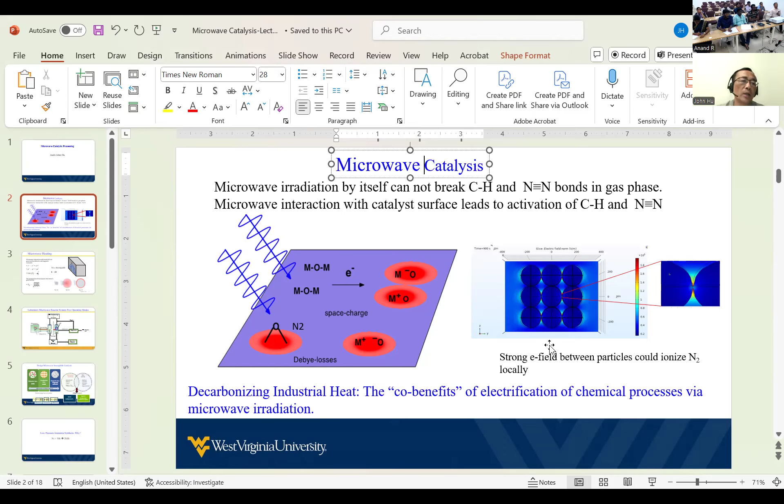We can flow methane and natural gas or nitrogen, and we can have different reactions going on, flowing over the catalyst. We can produce the material. And to the question you asked, we can also just use microwave to generate plasma. You preform plasma in the gas phase and flow it through, but that requires different energy. When I say microwave doesn't activate nitrogen, I'm talking about the scenario on the left-hand side.

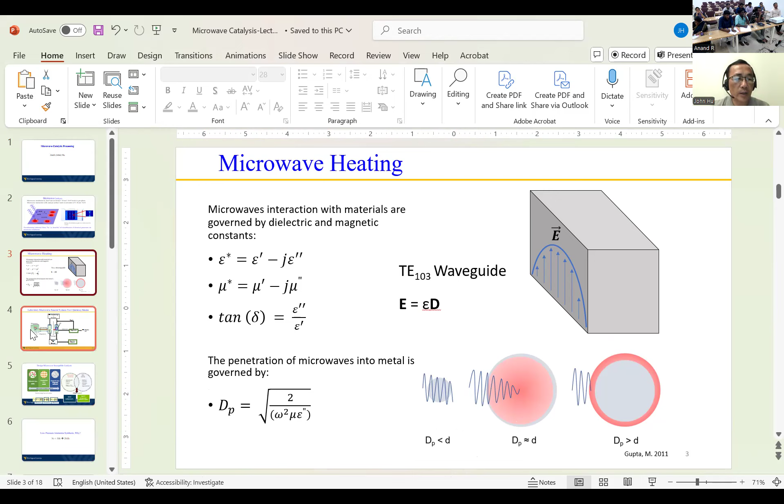If you look at the microwave, there's an equation shown here. How deep you can penetrate the material is all dictated by this one. There's a frequency factor inside here. The dp means how deep they can penetrate. Okay, so that's penetration, and then let's talk about microwave catalysis. Again, this is not plasma.

We don't generate plasma, which means we use a low power microwave under a certain frequency. Microwave catalysis means you have to design the material so it becomes susceptible to microwave. Okay, so this is different from conventional heating. With conventional heating, you just heat the material using, let's say, conductive heating and convective heating.

But with microwave, you have to design the material, make sure it is sensitive to microwave, so you can induce the activation of the molecule. There are different ways to induce microwave heating, or design the material. One is called the dielectric loss. Dielectric loss means the material has to have a dipole, that means positive and negative charge. The other is called conductive loss.

Conductive loss means, let's say, the carbon nanotube. There are a lot of electrons; they are electron conductive, so it's very easy to heat carbon nanotube using the microwave. The third property of a microwave is the so-called magnetic loss. So remember, the microwave is an electromagnetic field. There's the E field, there's the magnetic field. They travel together. So the magnetic field also interacts with some materials.

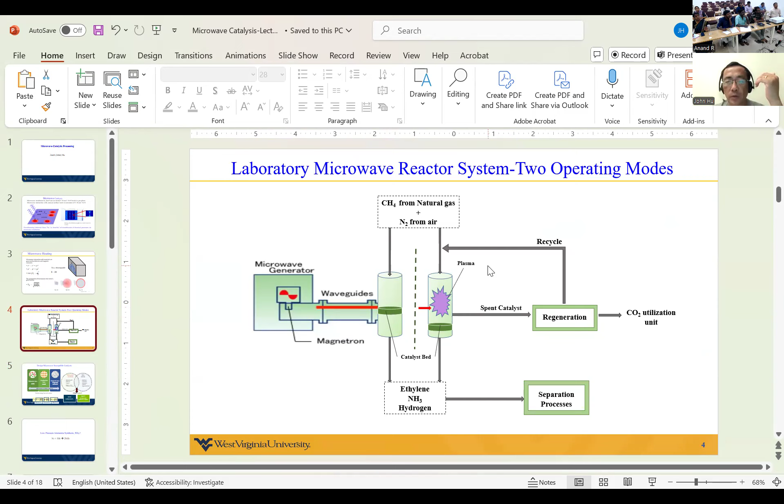The microwave reactor we have in the laboratory is a quartz tube. Quartz tube doesn't absorb microwave. That's the whole idea: we want the microwave to penetrate the quartz tube reactor. So this reactor is made of quartz. Okay, it's quartz. What's quartz? Quartz means silica, all right? So basically, silica is transparent to microwave.

Microwave is not conductive or convective heating. It's directly delivered energy onto the catalyst, so we do not have any loss on the reactor tube. The quartz is transparent to microwave. Okay. So now the thing is, if you design the catalyst having silica, it's not going to be microwave sensitive. So we have to modify the zeolite so that it becomes sensitive.

So anyway, when you design the catalyst, you have to watch the three properties to make the catalyst material. So this is the design concept. You have an iron component, you have nickel, copper, all kinds of sensitivity, and also you have a carbon support. Carbon support means it's conductive, and also you have a metal, also conductive, and you have the iron in there, which is magnetic.

Anyway, I don't want to go through the process. Normally, when I give this session to chemistry students, I go very deep. In the interest of the audience, I don't want to confuse you because there's so much chemistry; you have to have background knowledge in order to understand. I'm not going to downgrade your knowledge, but different fields have different understanding. So I want to focus on the high level.

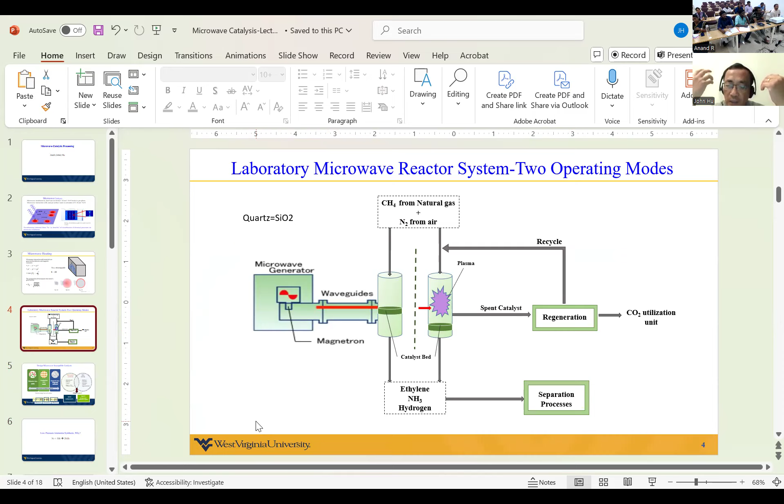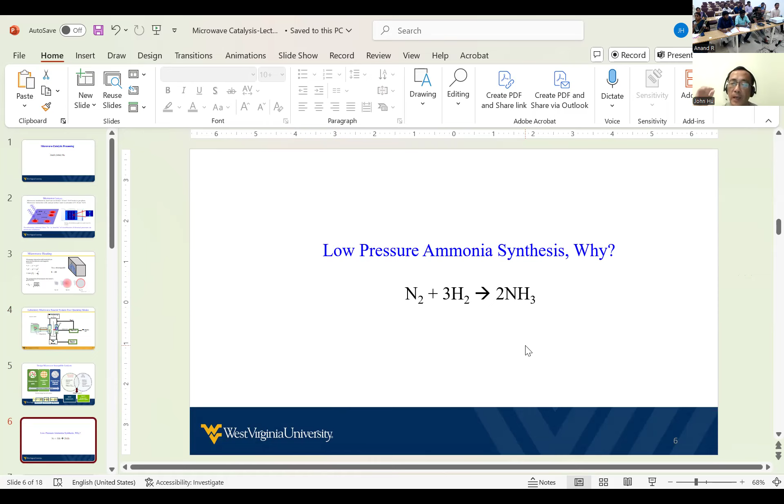So that's why low pressure operation is so important. We do not have the advantage of shifting equilibrium to the right, but we have the advantage of kinetics. We can make the reaction much faster and have a decent equilibrium conversion.

I'm going to pause here. Does anybody have any questions at this point?

My throat was so dry if I keep on talking. Anybody has any questions? If you don't have, I'm going to continue.

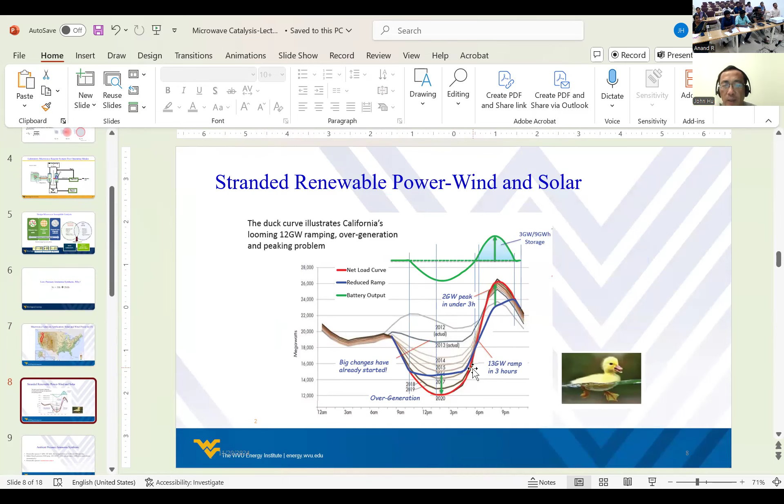In day one, I showed you this graph, all right? So basically, in the US, we build so much solar and wind, and then this becomes stranded, and then we want to turn this renewable power into ammonia, transfer ammonia to the East Coast and turn it back into electricity. I don't want to go through detail, but I also mentioned this: there's a mismatch of the demand and the supply. So then the project we have is we want to make ammonia at ambient pressure or low pressure.

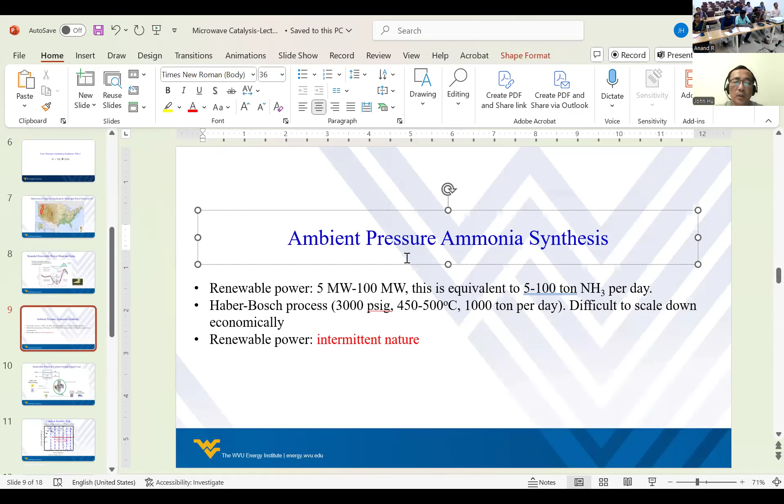I need to change the title. So either ambient pressure or low pressure ammonia synthesis, because the microwave reactor cannot operate at high pressure. Another reason we don't want to operate at high pressure is, remember, in the Haber-Bosch plant, it takes 3 days to start up, 2 days to shut down, because in a commercial reactor, you have to pressurize the reactor very slowly.

It takes time. But if you take 2 days to pressurize your reactor, the solar and the wind can only operate a very limited time. All right, in a single day, you can operate 10 hours on solar. So that's called the intermittent nature of renewable power. So that means the Haber-Bosch reactor, so-called steady state operation, 24 hours, 7 days operation, cannot be utilized to fit into renewable power, because of renewable power's intermittent nature. So you have to have a technology that you can quickly start up and quickly shut down. Okay, so that's what I showed you in yesterday's demonstration.

Another problem is scaling down the Haber-Bosch reactor from 1,000 tons to match with 100 tons. It takes effort. I sent a slide to Dr. Anand. He's going to distribute it. Tomorrow there will be a case study. I want the students to read it; we are going to go through the calculation. So pretty simple. So I basically give you a problem.

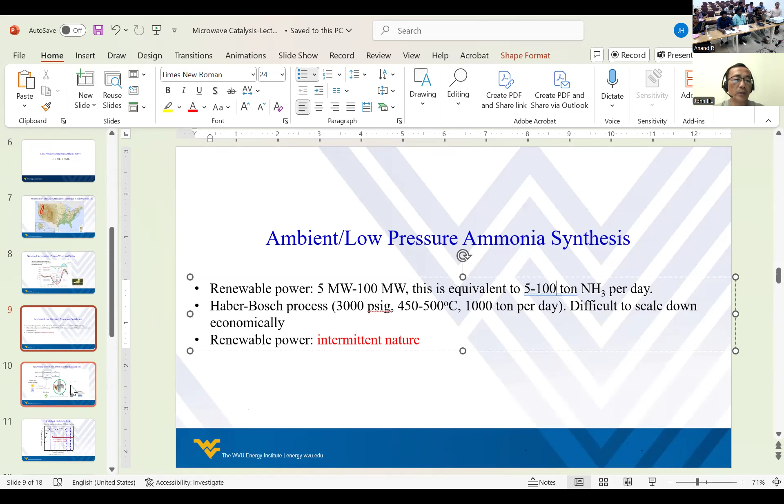So, all right. So here's what we do. I show you this one. You have solar and wind electricity, then we do electrolysis, hydrogen, nitrogen, and I talked about this already. So the technology we've been doing at West Virginia University, this is the basic microwave reactor. Look at the condition. We can operate at ambient pressure, 260 degrees C, which is much lower temperature than Haber-Bosch, much lower pressure. All because of the microwave. We can drive kinetics very fast, and we are not subject to the equilibrium. So I'm going to show you how we did it, why we are not subject to equilibrium control.

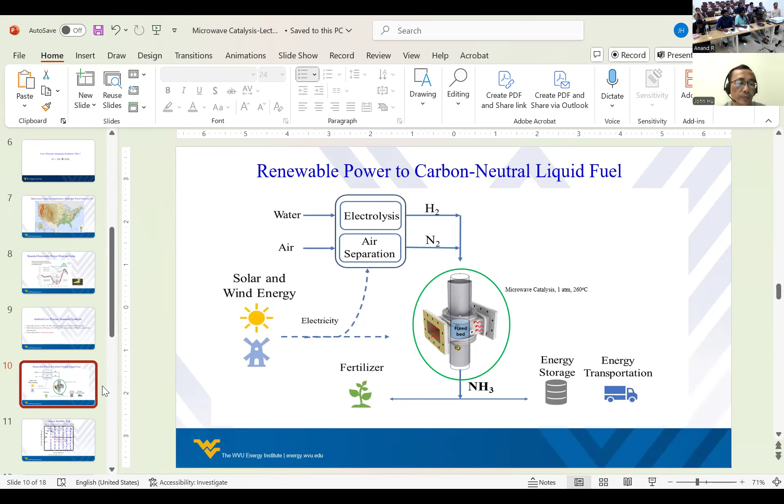Okay, so yesterday I showed you a graph. This is another graph to look at, and this catalyst. So the key in the microwave catalysis is the catalyst material. I want to go back to the cartoon I showed you. When I give a lecture, you may ask, hey, Dr. Hu, you sound so easy. You apply the microwave to the reactor, the magic will happen. No, we spent almost 8 to 10 years now just to design the reactor and design the catalyst. Because with the catalyst, you have to watch three properties in order to have a microwave-susceptible catalyst. So once you have the catalyst, then you can run the reaction.

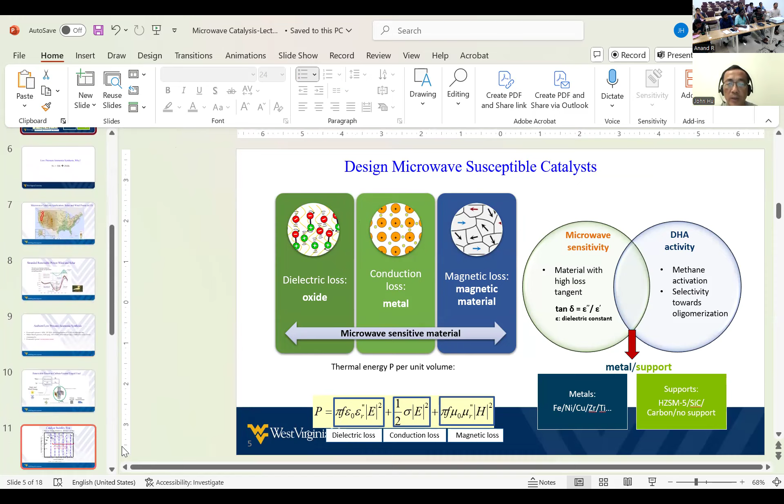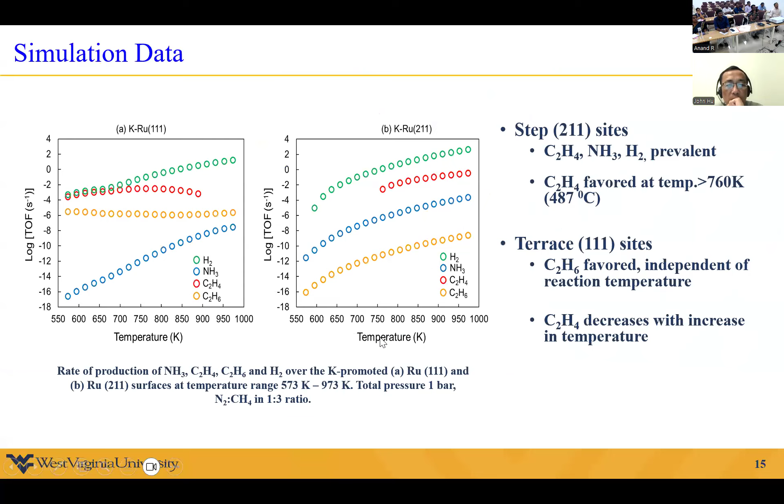Okay. All right. So let's keep on going. Let me see. We have probably about 20 minutes. I'm going to finish this because I'm going to talk about economics as well. Okay. So let's go to this.

Okay. I'm not sure if I shared. Can you see my slide here? Yes, sir. Okay. You can see my slides, all right? So you can see my slide. Yes, sir. Okay. I'm writing my question. Maybe I'm not clear.

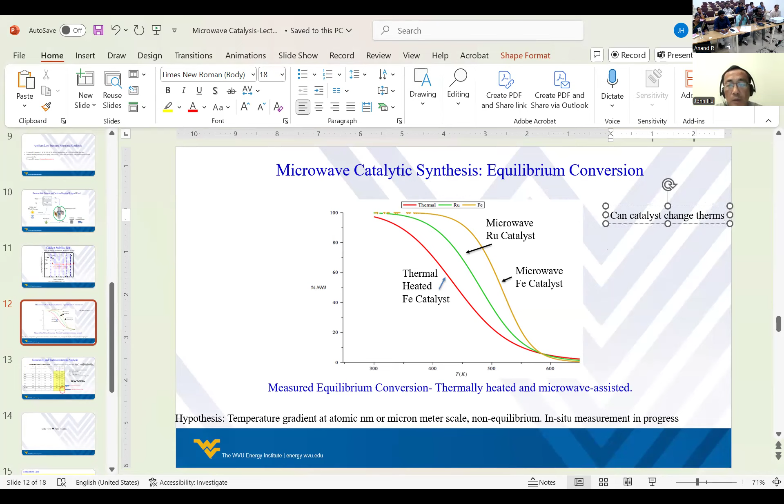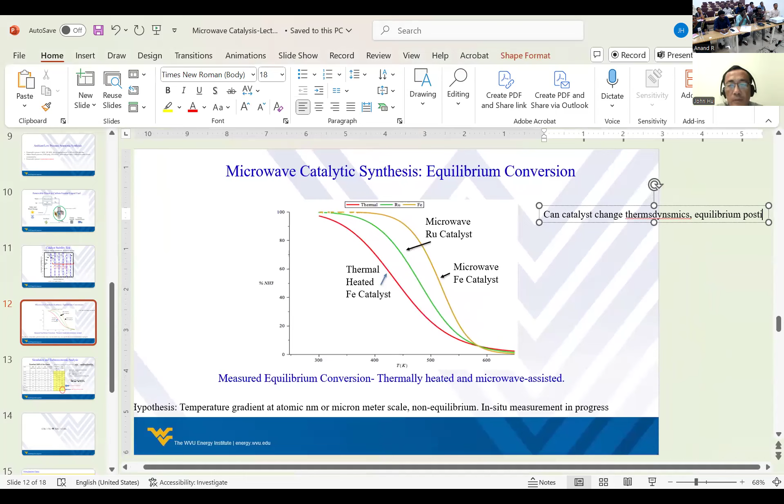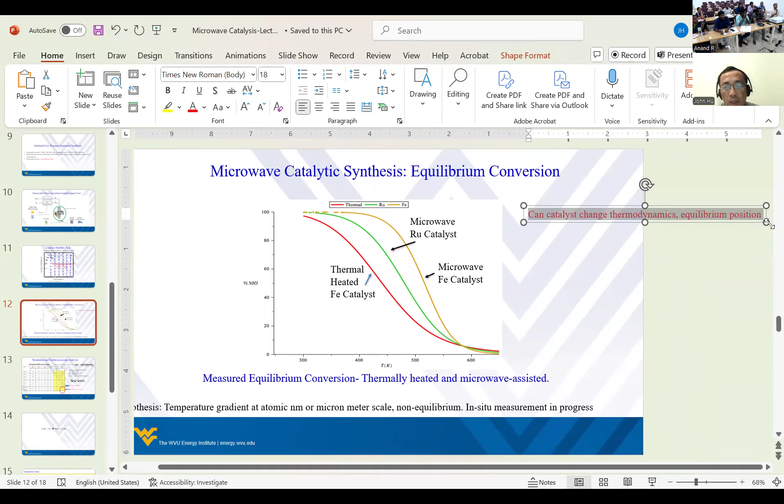Can everyone read my question? Yes, sir. I need an answer. Can anybody tell me? I'm testing your knowledge, because if you don't know the answer, you don't understand this curve. You should learn this in high school. Yeah, a catalyst can change the thermodynamic equilibrium. Can or cannot? It can change.

So the answer is no. The catalyst can only speed up kinetics. The catalyst will speed up the reaction to reach the equilibrium position. The catalyst will not change the thermodynamics. Thermodynamics is dictated by temperature and pressure, no matter what catalyst you use. So let me put it this way. The catalyst equally speeds up the forward and the reverse reaction, making the reaction reach equilibrium faster. The catalyst cannot shift the equilibrium. Basically, the catalyst deals with the kinetics.

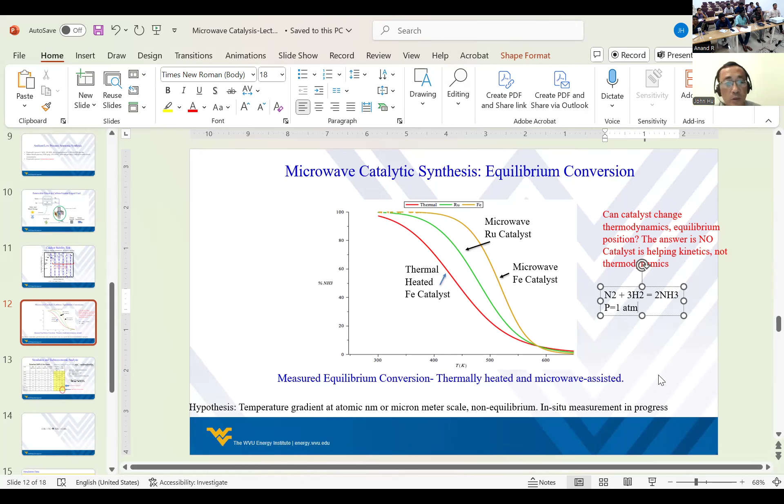Okay, let me try to emphasize it. Under thermally heated conditions. Thermally heated means you are basically using the thermal furnace and heating to temperature. That's 400 K. So under thermal heating, we have one equilibrium line. Okay, this is very important. It's still controversial.

Okay. So basically, this is 400 K, the equilibrium at 400 K. When you use the thermally heated iron catalyst, you get one data point. Then we put it in the microwave reactor using the ruthenium catalyst, a different catalyst, and the 400 K point is here. Then we change the catalyst back to the iron catalyst, but under microwave heating, it's here. Same temperature, okay? You see the point? The same temperature, different catalysts. We have three different equilibrium positions.

Remember, if you open the chemistry book, a catalyst does not change the equilibrium position. A catalyst only helps the kinetics. There's no kinetic issue because we are measuring thermodynamics. So the question is why we have three positions. In theory, if microwave and thermal heating are the same, the three lines, red, green, and orange, should be overlapping. It should be the same line, because it doesn't matter how you change the catalyst or whether you use microwave or thermal heating, since you are operating at the same ambient pressure and the same temperature, 400 degrees. You should only have one data point, not three.

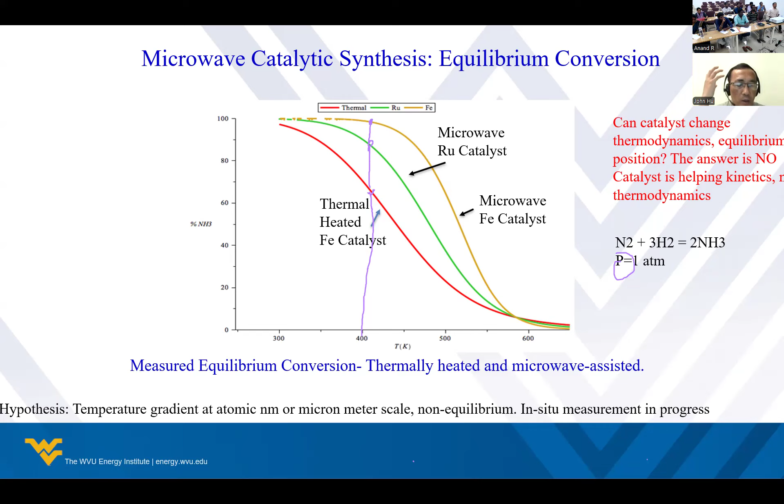So to answer your question, the material has to be induced by microwave by all means, like the three parameters I showed you. The material has to be dielectric sensitive, conductive sensitive, or magnetic sensitive. So it's not magic. To summarize what I said today, microwave catalysis is a combination of microwave electromagnetics and material science, and then you apply it to catalysis or chemical synthesis. Make sense? Yes, sir.

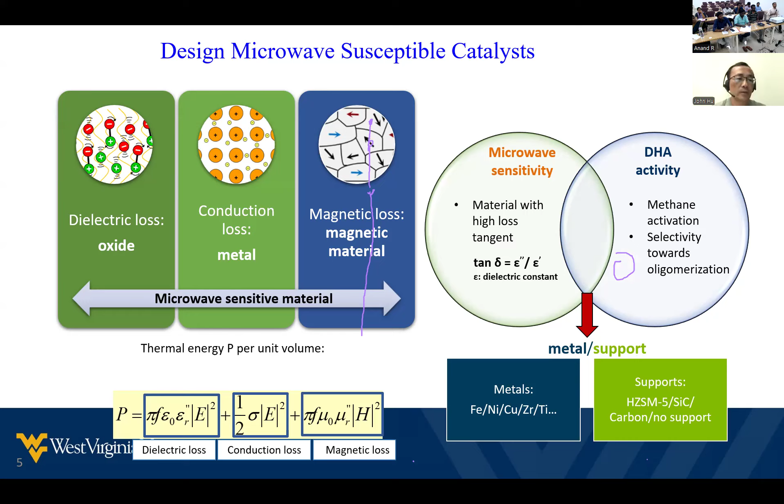So we will continue tomorrow because I don't want to rush through my slides. I save slides for tomorrow because this table takes me time to interpret to you. I think some students asked that a high pressure cryogenic condenser to separate ammonia is very expensive. Yes, for the high pressure Haber-Bosch process, you have to use a high pressure condenser.

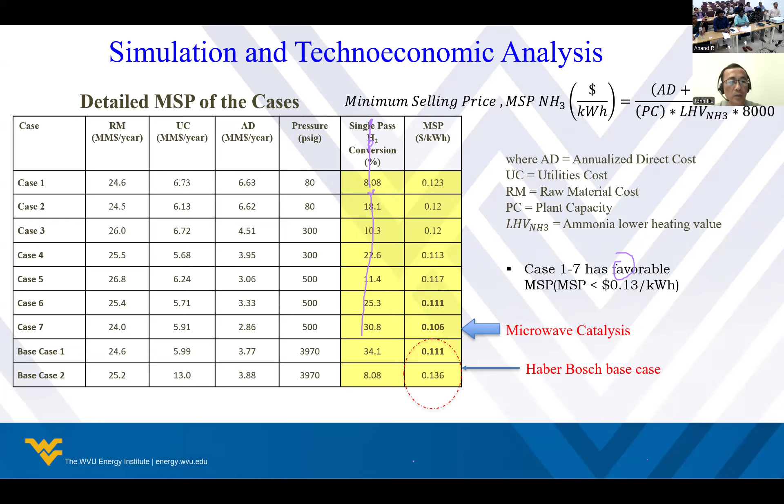So let's stop here, and tomorrow we continue on economics, and then shift a little bit to nitrogen reacting with hydrogen. Remember, in the Haber-Bosch plant, you have to reform methane into hydrogen, costing you 50% of capital. By using microwave, you bypass the steam reforming. You save at least half the operating cost and half the capital cost. You can make ammonia and also ethylene.

I had a PhD student. She's from India, she got her PhD and went back to India. Now she's working for Honeywell, I think Honeywell India. That's a very good company.